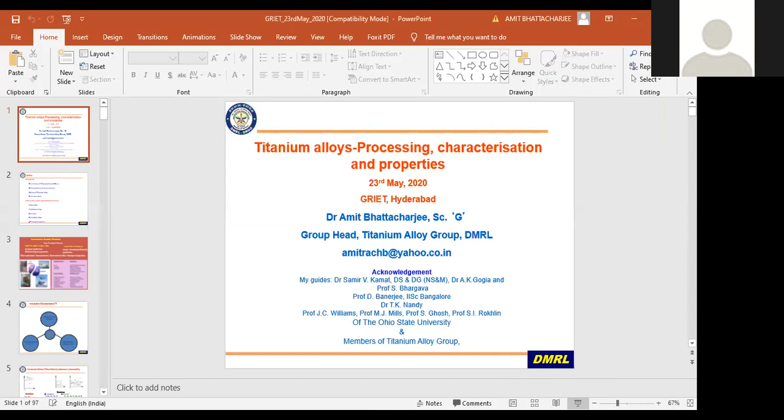Amit sir, good afternoon. Yeah, good afternoon. You are able to hear me, right? Yeah, it's crystal clear, sir. Okay, you can share the screen, sir. I'll just... Yes sir, it is visible. I can start, or should I? Yes, wait sir. Should I start? Let's start, sir.

Okay, good afternoon to you all. I am Amit Bhattacharjee, and thank you, Tanya, for the kind introduction.

I will talk about titanium alloys, its characterization and processing, as well as try to correlate the properties and the usages so that you can get a flavor of it. I will not go too much into metallurgy, although some amount of microstructures have to be shown because it correlates with the properties. So I will try to keep metallurgy to the bare minimum as possible.

Firstly, I need to acknowledge my guides, Dr. Samir Kamat, Dr. Gogia, and Professor Bhargava, who is no more, and Professor Banerjee, who introduced me to titanium alloys when I joined DMRL. Then Dr. Nandy, who was the earlier group head of titanium alloy group, and the professors at Ohio State University whom I worked with for the FAA-funded project - Professor Williams, Professor Mills, Professor Ghosh, Professor Rokhlin - and also the members of the titanium alloy group.

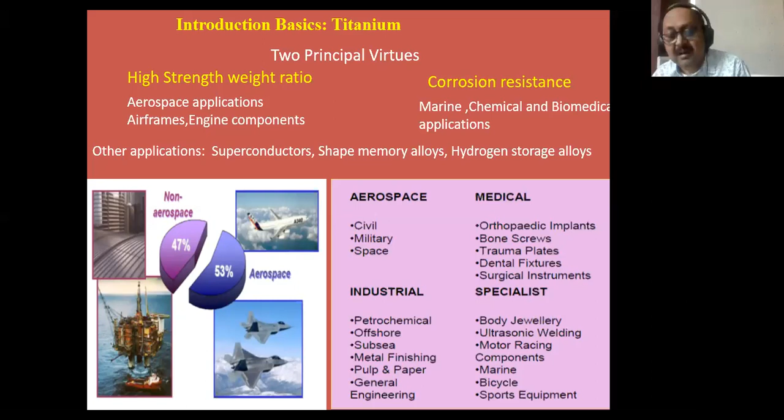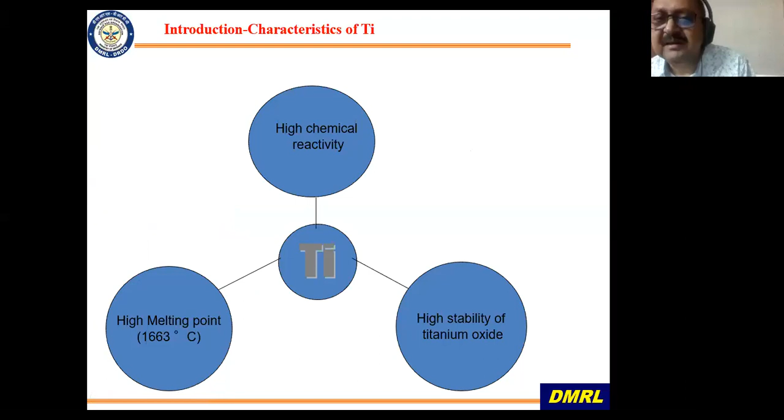Now coming to titanium, its melting point is around roughly 1663 degrees centigrade. Its problem is the oxide is very stable, and that is the reason it took many years to extract it for use as an engineering metal and alloy. It has also got high chemical reactivity, which is why it has to be melted in vacuum, and care has to be taken while processing it.

Now, as far as alloying elements are concerned, as you all know, titanium exists in two crystal structures: first is alpha, which is a hexagonal close-pack structure, and beta, which is a BCC structure. The alloys that stabilize either of these phases are known as either alpha stabilizers or beta stabilizers.

The elements in the beta isomorphous category are vanadium, molybdenum, niobium, tantalum, and tungsten. In the eutectoid category are iron, manganese, chromium, nickel, and also hydrogen, which is one of the gaseous elements that stabilizes the beta phase.

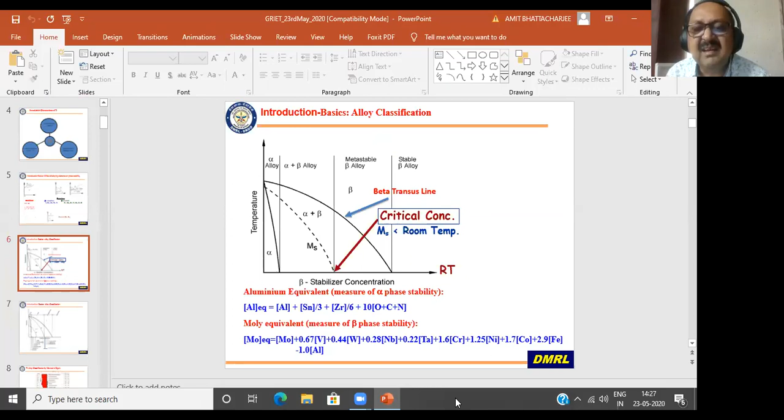In titanium also, yes. Please ask Ajay Kumar. You have a question? No sir, questions we will take in the end only after the presentation. No, we will not take questions now. Okay, fine.

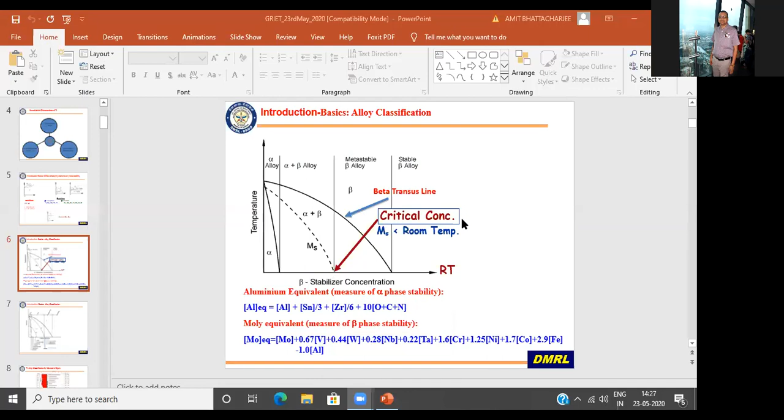So coming back to this, this line is known as the beta transus line, and it is very important for titanium alloys. In most of the alloys that you buy, you will see the beta transus temperature of that alloy, and above which the alloy exists in the beta phase, single phase beta region. So for each alloy, because the processing is done either above or below this, this transus line is very important. This is known as the alpha transus line, and below this the alloy composition will exist in single phase alpha region, and in between you have alpha plus beta.

Now this is where the conventional classification of the titanium alloys is shown on this diagram. On the extreme left hand side, where you have almost negligible beta stabilizer concentration, what you have is single phase alloys, known as alpha alloys. These are non-heat treatable. We'll look at each category in detail, but here I'm just giving you the classification.

Then you come into the region of alpha plus beta alloys, where the beta stabilizer concentration is slightly higher, so you have both alpha and beta phases existing. Beyond that you have the category of beta alloys, and the first region is where the beta stabilizer concentration is comparatively less, known as the metastable beta alloys, and at higher alloy concentrations, it is known as stable beta alloys.

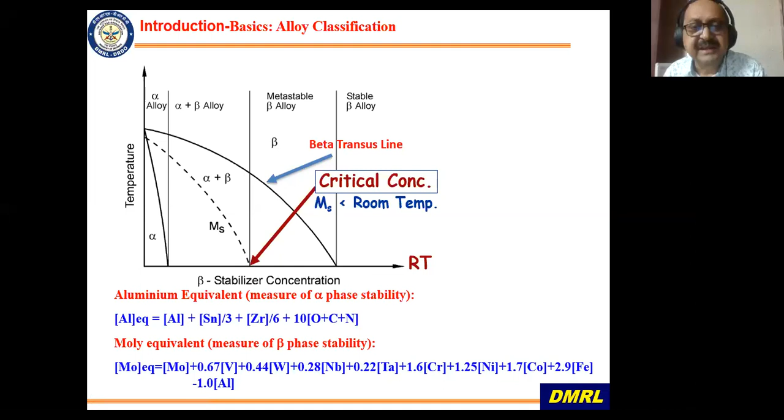Here again, examples of certain alloys are given. From here in the alpha alloy category, you can see Ti-5Al-2.5Sn. You only have alpha stabilizers, and then commercial purity titanium also comes into this. As you all know, commercial pure titanium has got quite a good strength level, and it can compete with many of the aluminum alloys, which is why it's also an important category. Then you come into the alpha plus beta alloys, where one of the important alloys is Ti-6Al-4V, and 50% of the world titanium production is of this alloy.

And then there are other alloys which are for high temperature application, which also belong to the category of near alpha titanium alloys.

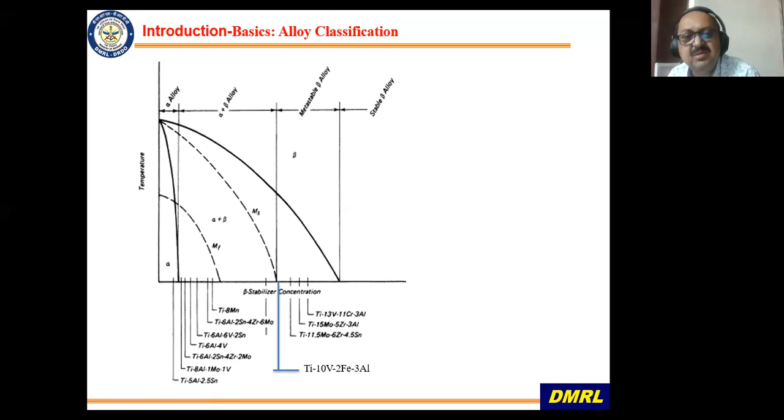And then when you cross the martensitic start line, you go into the beta alloys. The first one widely used is titanium 10 vanadium 2 iron 3 aluminum. It is one of the metastable alloys that Boeing uses for landing gears and other applications, very widely used. There are other beta alloys, and we'll talk about one or two later on. This is again just to give you an overview of classification.

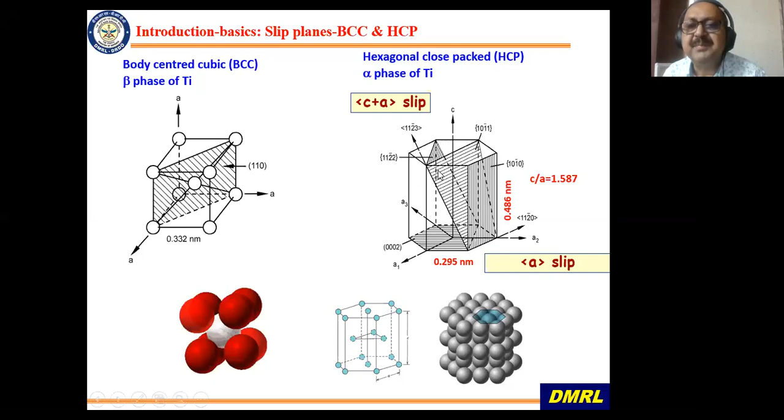Now I will try to explain the Burgers orientation relationship. If you have looked at the microstructure of titanium alloys, mostly you must have seen Ti6Al4V beta transformed structure. You see a very geometric pattern, and that is because of this Burgers orientation relationship.

Most of the transformations in conventional titanium alloys is beta to alpha or alpha to beta. Now, the close packed plane of this maps onto this plane, and one of the close packed directions matches perfectly with this, and the others are slightly off.

So when you heat, let's say, Ti6Al4V to the beta region, it goes into this phase, and then when it transforms to alpha, each of these planes has 2 close packed directions, and you have 6 such planes. So you get 12 variants of the alpha phase, and that is why you see a very geometric pattern in the microstructure, a resultant of this Burgers orientation relationship.

The close packed direction of the HCP matches with the close packed direction of the BCC, but only in one direction is it a perfect match. In the rest of the directions, it is slightly off, and that is how it is in titanium alloys.

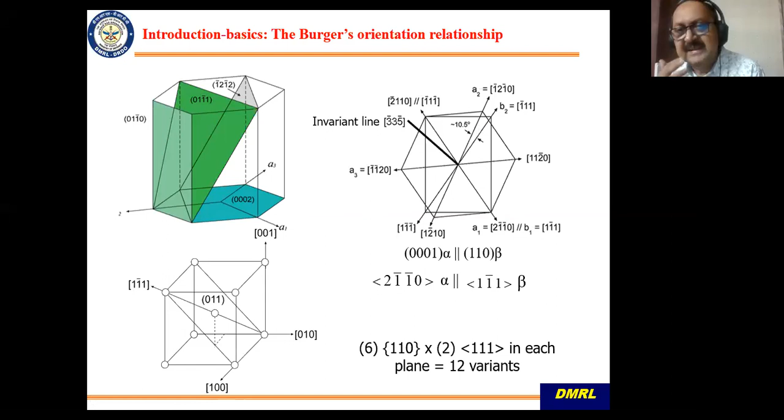Now, I will briefly talk about some of the heat treatments you hear about, so that you are aware and not perplexed when I mention them. First is homogenization. After melting, the first thing done is that the ingot is heated up high into the beta regime, because there are a lot of segregations and things like that.

If you anneal or homogenize at high enough temperature, chances are that you will reduce the segregation. Homogenization is normally done high up in the beta region, roughly around 1100 to 1200 degrees centigrade for all the ingots. Then we come to solution treatments.

There are several solution treatments. Two of them commonly used are, one is beta solution treatment. In beta solution treatment, you take the alloy to this beta regime just slightly above. You do not want to take it too high, because the BCC structure is a very open structure and diffusivities are very high.

There can be very large grain growth if you take it too high a temperature or keep it for a longer time, so you have to be careful and do a shorter time. The beta solution treatment is done just above the beta transus, maybe maximum 50 to 100 degrees centigrade above the beta transus of the alloy.

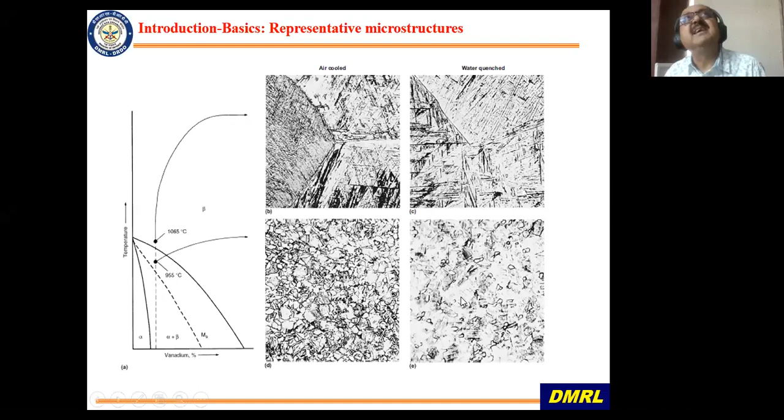As far as alpha plus beta alloys are concerned, if you heat treat an alpha plus beta alloy like Ti6Al4V into the beta phase, and then you have cooled it, either air cooled or water quenched.

If you water quench, you will get martensite. I will show you the martensite, but here it has been air cooled, and you can see different colonies of alpha. This is called alpha colony. That is where the titanium alloy starts becoming complex. You see, you have one grain which is a prior beta grain, but you have in them several colonies, and you can see the geometric pattern that I was talking about when discussing the Burgers orientation relationship.

So these itself can have different orientations, so they can work as subgrains. That is where the properties etc. start getting affected.

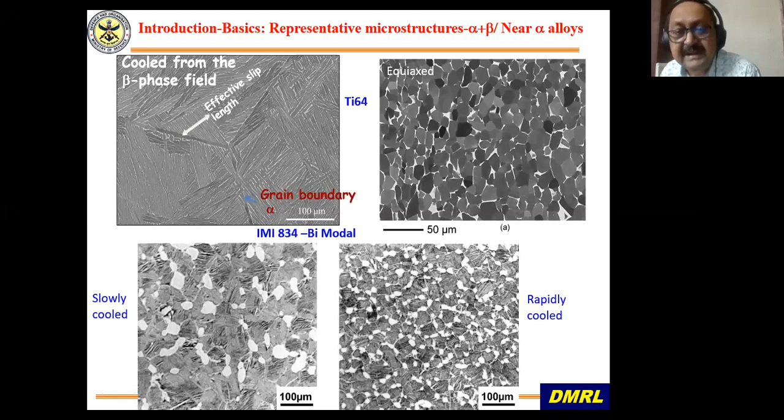Now this fine alpha is precipitated in a different region. Once you have aged this alloy, then only this fine alpha precipitates and gives it high strength. So all these beta alloys have got much higher strength as compared to Ti6Al4V and such.

But in these alloys, after you have alpha plus beta deformed, you solution treat in the alpha plus beta regime, and then you have to age it to get this. If you deform, solution treat, and cool Ti6, you will get this precipitation of the alpha. But in this one, not. So that is the difference between beta alloys and the alpha plus beta alloy.

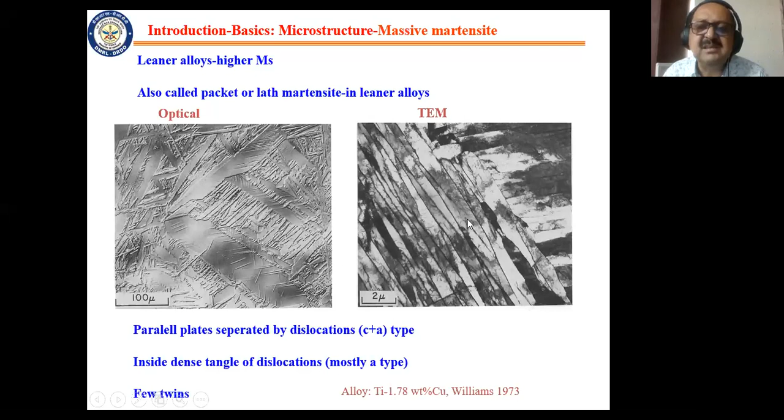Again, in the TEM picture, this has got very little twinning in it, and a lot of dislocation structure which you can see inside. Then in alloys which are much richer, same type of alloy but now with the copper percentage increased to 12%, you see the structure of the martensite is slightly different. It is again very fine lath, but now you can see a lot of twins inside if you do TEM. So this is called acicular martensite, and it occurs in much richer alloys where the MS temperature is comparatively lower as compared to the other example I showed you.

But remember, in titanium, martensite does not strengthen as much as in steel, because it does not trap interstitial elements and doesn't cause that much distortion. But it certainly refines the microstructure and causes a slight increase in strength, but not as much as in steels.

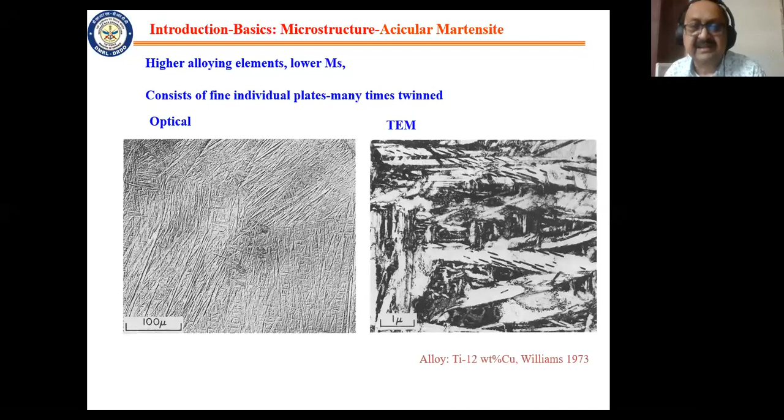Now again, another example is 10-3, which is a beta alloy. If you beta solution treat it and then start deforming it, that is, even do a tensile stress testing - if you remember, 10-3 I had shown on the verge of stability and metastability, so it is on the boundary line of crossing over from martensitic to non-martensitic. So it is on the borderline, and it retains the beta phase when you quench from above the beta transus temperature. But when you start deforming it, that is, you push the material or give it a slight amount of energy, it starts transforming to martensite.

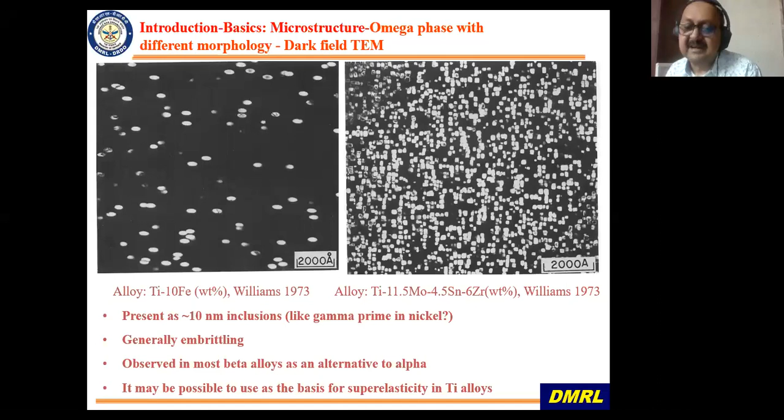Similarly, different other morphologies of omega phase can occur, in cuboidal shape or ellipsoidal shape. Again, it depends on the misfit which is there due to the alloying element. But these phases you will not be able to see even under SEM, although they will affect your mechanical properties. So in case of beta alloys, you need to be careful.

That is why while processing beta alloys, you have to be careful. There are strategies for processing all titanium alloys as well as beta alloys, so that you don't get much precipitation of alpha around the grain boundaries. But that is a common thing in beta alloys, and you need to be careful.

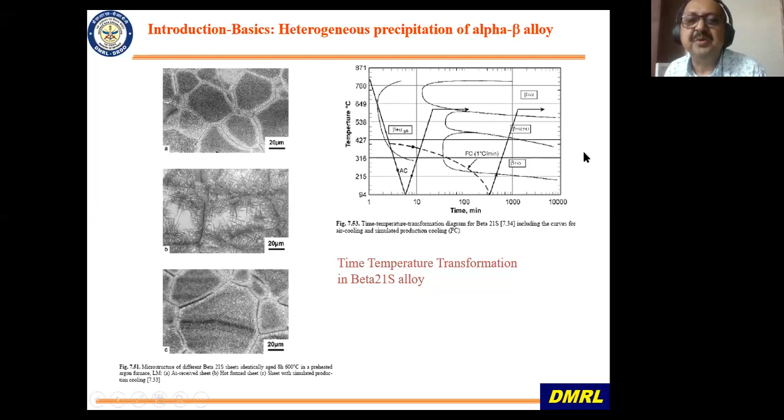The other very important aspect where titanium alloy differs from steel is, if you want to globularize, most of the time you will see that alpha and beta precipitate as lamellar structures. If you want to make it globular, it is not possible just by heat treatment as in steel. What you have to do is deform it.

That is why many titanium alloys are given a lot of deformation in the alpha plus beta regime. Otherwise, you will not be able to refine the grain sizes and globularize them. Once you take it to beta, all this effect is lost. So again, in titanium alloys, you have to be very careful and monitor your temperature very well.

Now I talk about melting, although I'll not discuss it in detail. This is one of the titanium sponges, the first sponge cake made in DMRL. As you know, it is produced by Kroll's process, where titanium oxide is converted to TiCl4, and that is reduced by magnesium, which is driven out. Then you get a cake like this, known as titanium sponge, which is then crushed. That is the starting raw material.

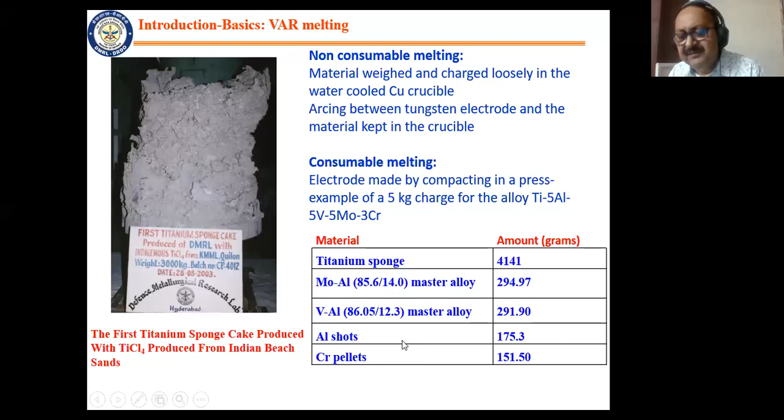So what you do is add them as master alloys. Here we have used moly-aluminum master alloy, and also vanadium-aluminum master alloy. Then you can add extra aluminum, or any other element that is needed, mix it thoroughly physically, and then press it into an electrode to make an electrode.

This is just a schematic of a VAR melting process. Here I'm showing a consumable melting. This is called a stringer rod, and this whole thing is enclosed in vacuum. Here you have the vacuum pump. Here you have the electrode.

The same thing is shown here also, and this is a copper crucible which is water cooled from outside. Here the water comes in and goes out, and by arcing you are melting, and then it is depositing in the crucible. Slowly this is lowered, and the electrode gets consumed and solidified in the copper crucible. Here I am just showing one industrial furnace which is underground, so you can see the top part of it.

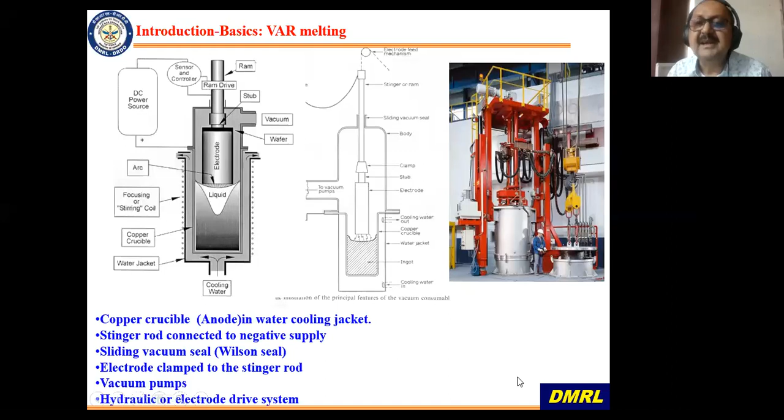It can be above ground also, so both are possible. Industry furnace capacities are roughly from 250 kg to 10 tons, so these are huge furnaces.

Now let's talk a bit about the corrosion resistance of titanium. Titanium has got very good corrosion resistance. Here the galvanic series in flowing seawater is shown, and you can see titanium is towards the top end, so it has very good corrosion resistance against seawater and many other chemicals. That is seen in this galvanic series in seawater.

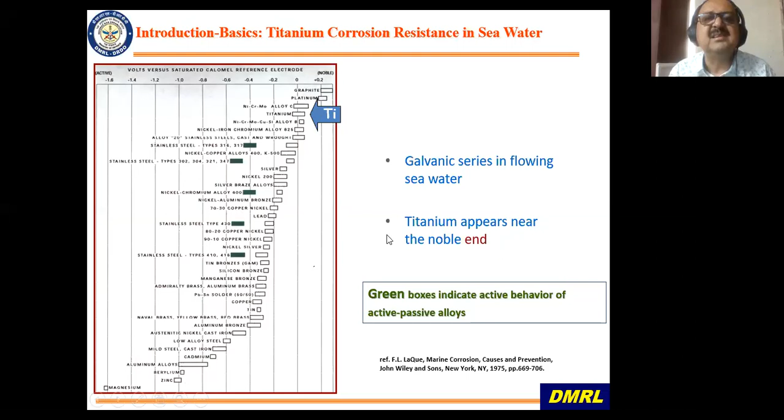Now, the reason titanium has very good corrosion resistance is because it has a very thin protective layer of TiO2 on the surface. It forms, but mind you, this is not as impervious as in aluminium. So it does oxidize, but still it serves a lot of purposes and protects titanium.

This oxide layer performs very well in oxidizing atmospheres or solutions which have chlorides, sulfates, etc. But it does not perform very well in reducing atmospheres like sulfuric acid, and also HF. That is why HF plus HNO3, known as Kroll's reagent, is used as a common etchant for titanium alloy.

The corrosion resistance of titanium can also be enhanced by adding certain elements like palladium. So in electrode materials, palladium and such elements are added so corrosion resistance increases. Another point about titanium alloys is there are no inclusions because they are melted in vacuum, very pure materials, unlike steel. So they are absolutely clean, and there is no pitting corrosion taking place.

But titanium alloys do undergo crevice corrosion because of the nature of this oxide. And hydrogen also can cause problems because hydrogen is very much soluble in most titanium alloys, and it can cause embrittlement problems, so you have to be careful.

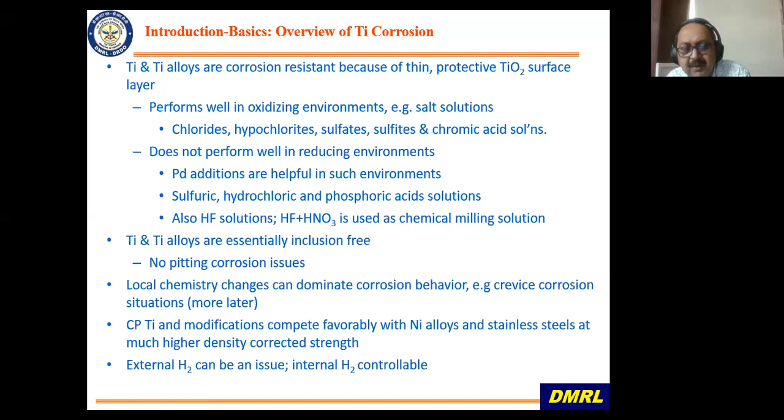So I will now talk about different alloy systems and then finish off. I will go on first to alpha alloys.

Here are the commercial alpha alloys. Several alpha alloys are shown here, starting with several grades of commercial purity. CP stands for commercial purity titanium, and you can see the only alloying element is oxygen, with some amount of iron put in to control the grain size. Otherwise these are single phase materials, difficult to control the grain size.

Here I am showing you the yield strength. Oxygen dissolves very well in titanium, a large amount of it does dissolve, and it is one of the main strengtheners. Although it also embrittles, it is used as a strengthening agent, and you can see here that as you increase the oxygen, yield strength levels go up. So there are several grades of CP titanium depending on what oxygen levels you want, and as I told you, palladium addition also improves corrosion.

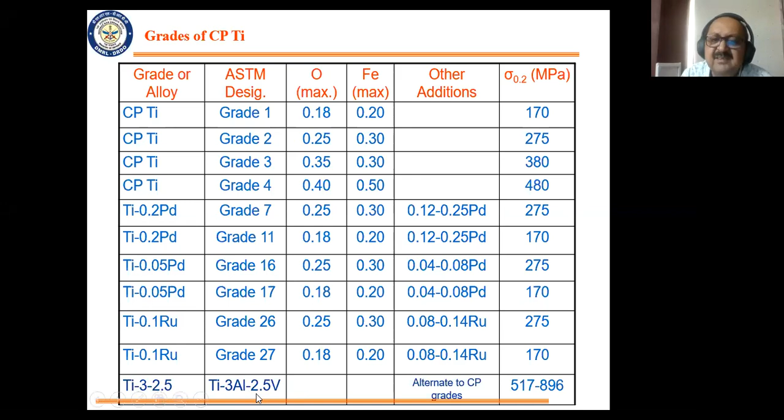So these are known as non-heat treatable alloys. Another alloy classified in alpha as well as alpha plus beta is known as half alloy. I did talk about half alloy earlier. It has got a composition which is half that of Ti6-4, and it is used for making aircraft tubes and all, I will show you that. And the strength level is in this regime.

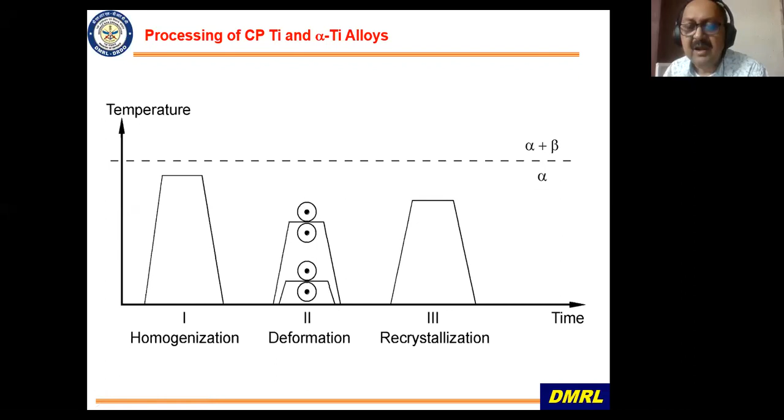Now, how are these alpha alloys processed? First, it is homogenized in the alpha regime itself, that is heated, and then deformation, that is forging, rolling, everything is done in alpha phase field only, and then recrystallization heat treatment also in the alpha phase field. Temperature you can choose depending on the grain size that you want, so recrystallization temperature also is in the alpha phase field, and this is how commercial purity titanium and alpha alloys are processed. Very simple processing, not much.

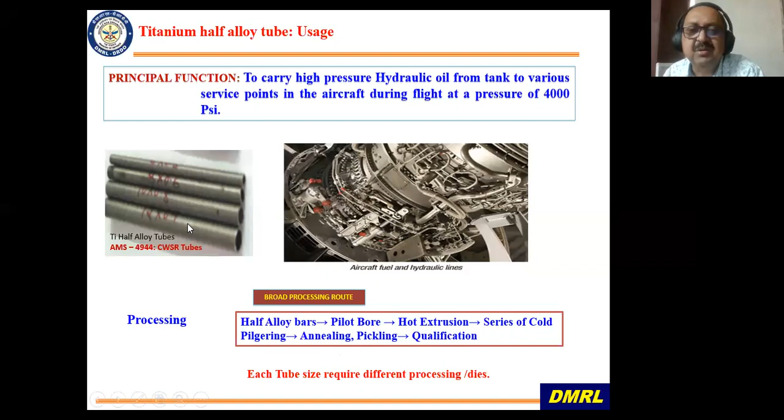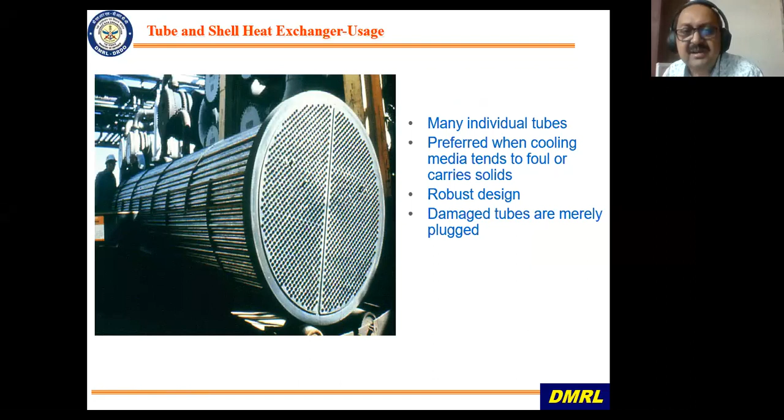Then another application is heat exchanger. All these tubes are of commercial purity titanium, or you can use other alloys depending on the strength, etc. that you want. But titanium alloy is certainly one of the major applications, also the heat exchanger applications.

Temperature wise, strength wise, it is in the middle category, and there are two types of Ti6-4. One is normal Ti6Al4V, which has got higher amount of oxygen, strengths are higher, and another which is used for formability applications is known as ELI grade, which stands for extra low interstitials, where the oxygen and other interstitials are limited to 0.13 or 1300 ppm. And then we also have near alpha alloys which are used for high temperature applications.

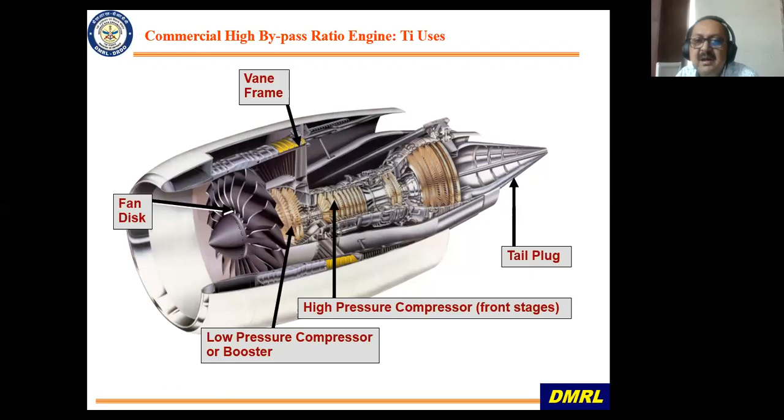In alpha plus beta alloys, but not in beta alloys, I will show what forms in beta. And then you have the precipitation of intragranular alpha, that is the other alpha that precipitates. It can strengthen, it can do other things.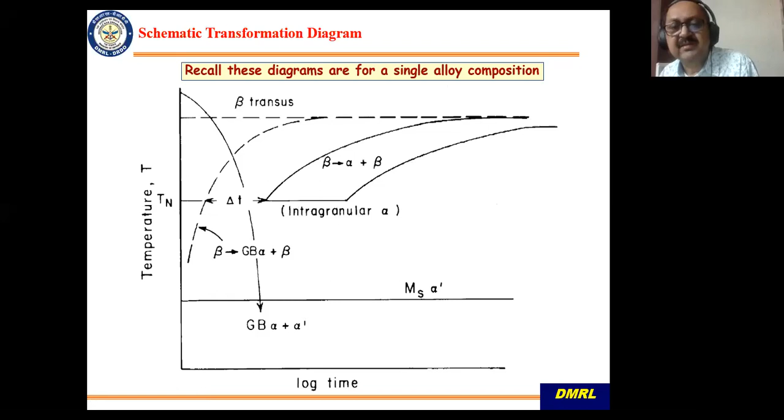Here I am trying to show you the general property trends of different microstructures. On the y-axis you have tensile ductility, and on the x-axis, the yield strength. An equiaxed structure always has higher yield strength at similar ductility levels. So a lamellar structure has got comparatively lower tensile ductility as compared to equiaxed structure. So if you are looking for formability applications, you should use this kind of structure, not a lamellar beta treated structure. You will not be able to form it very well.

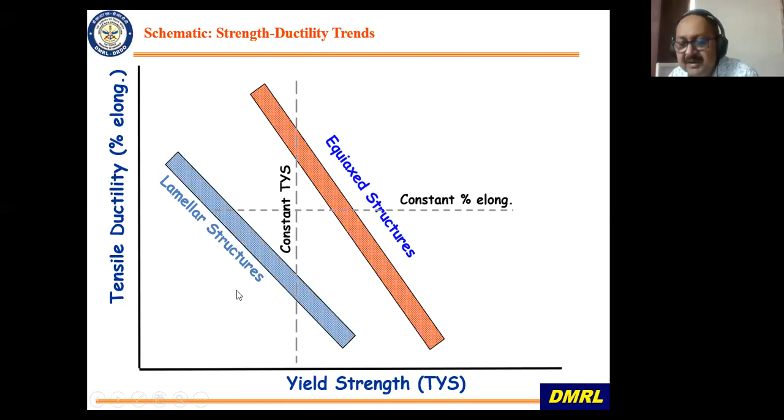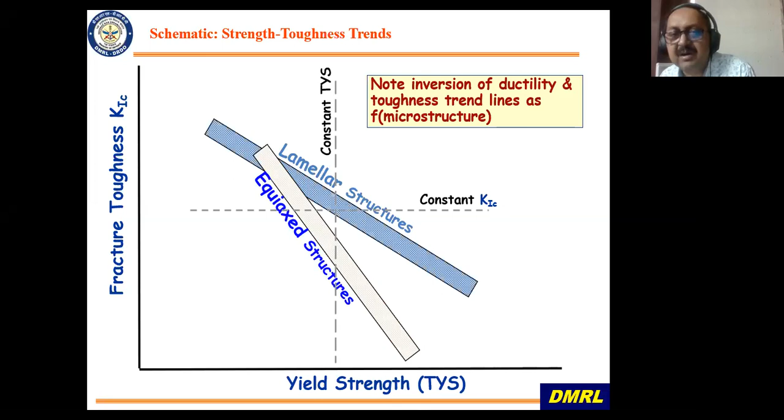Then here I am showing you the fracture toughness versus yield strength. A lamellar structure, that is a beta treated structure, has got a higher fracture toughness at similar strength level. An equiaxed microstructure or a bimodal microstructure has much lower fracture toughness as compared to lamellar structure, which has got a higher fracture toughness always. So if you want good fracture toughness, you should go for a beta treatment to get a lamellar structure.

Now, if you want to do a fully equiaxed or a bimodal processing of alpha plus beta alloys, what you have to do after homogenization is deform, giving a lot of deformation in the alpha plus beta regime. Remember, this is to break up the alpha laths so that you can globularize it, and then recrystallize slightly higher than the deformation region, and then again finally aging, a similar aging. So depending on the cooling rate during the heat treatment after recrystallization, you can get either an equiaxed microstructure or a bimodal microstructure.

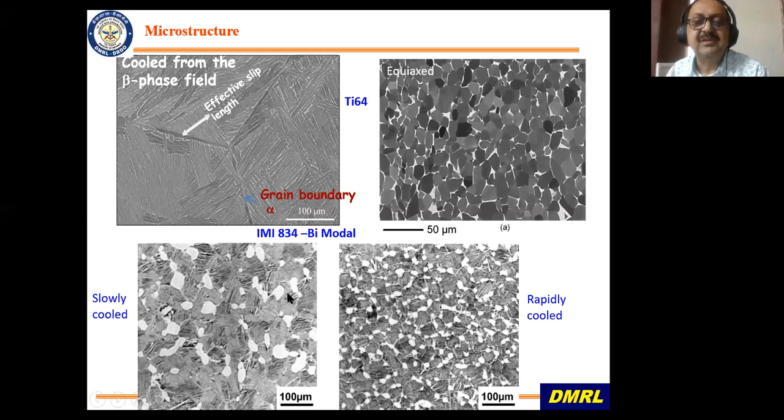Now, many times you would like to have a combination of good fatigue and good creep. So that is where this thing comes in - it gives a good combination of fatigue and creep properties. Fatigue because it restricts the grain size to a finer grain size, and the lamellar structure gives you good creep. So these kinds of processing are done for compressor blades, turbines, and all these kinds of things.

Now I will go on to near alpha titanium alloys, which are a subcategory of alpha plus beta alloys.

Near alpha alloys occur towards the left-hand side of the pseudo-binary phase diagram, towards the alpha phase. What you try to do is reduce the beta phase, because beta phase has got higher diffusivity, so it is not good for creep applications. So you decrease the amount of beta stabilizers, add neutral stabilizers like tin and zirconium. Tin also combines with aluminium to precipitate alpha 2, which strengthens, and that is what is used in high temperature titanium alloys. You replace the higher diffusivity beta stabilizer like vanadium with lesser diffusivity beta stabilizing elements like moly, niobium, etc., so that diffusivity is lesser and you can get good high temperature properties.

The other problem with near alpha titanium alloys is you have to restrict iron and nickel like anything. You have to be at ppm level. I'll show you the effect, but it really spoils the creep properties, and that is why titanium sponge with very low iron and nickel is very rare in the international market. These are very low levels. Let me show you how much.

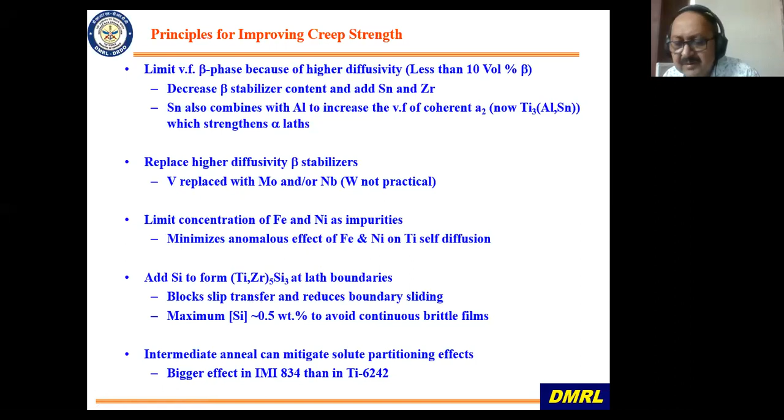Silicon is used in most high temperature titanium alloys because it basically improves the creep properties by blocking the slip transfer, restricting deformation between the laths. I will show you the microstructure of this. There is also an intermediate anneal which can improve the creep, but I am not talking about that in detail now. When we talk more about titanium, we'll cover that. Now, this is how the near alpha titanium alloys are processed.

Now here I am showing you the comparison of two types of structure and creep. This is a bimodal structure, this is a lamellar structure. As I told you, this is strain and this is time, at 600 degrees centigrade and 300 MPa of load. The bimodal structure has higher creep deformation, whereas a lamellar structure, that is a beta treated structure, always has a good creep property. This is a lamellar structure of the IMI 834 high temperature titanium alloy, and this is a bimodal structure. These are optical microstructures.

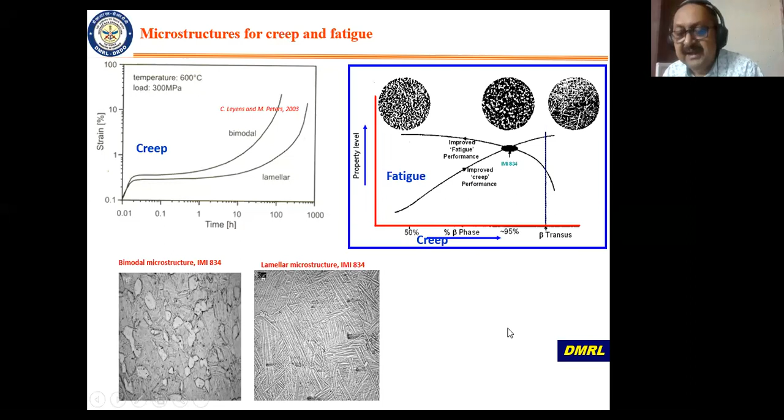Now here is the crossroad. On the y-axis we have fatigue, and on the x-axis you have creep. So both are at crossroads. That is why, wherever you want both of them, you have to have an optimum structure, and that is where the bimodal structure comes in, which is a creep-fatigue optimized microstructure, used for blades, discs, etc. in the rotating parts of an aero engine.

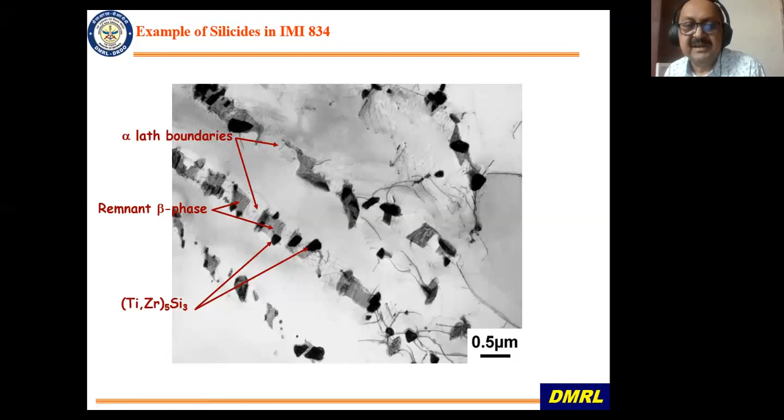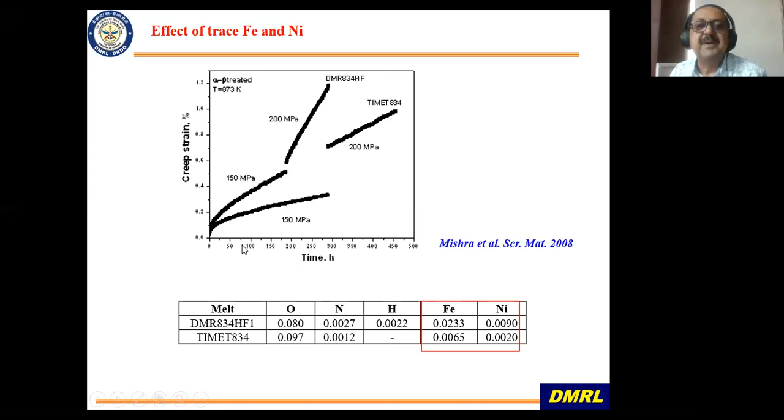Here you can see two alloys: TIMET834, which has got much lower iron and nickel, compared to DMRL 834, which has a much higher iron and nickel content. Mostly iron and nickel come from the titanium sponge and also the master alloys that you use, so you have to be careful with them. You can see the jump in creep properties only because of this.

Then I come to another important property, known as dwell fatigue. Many aero engines experience this. As compared to a sawtooth kind of loading, in dwell fatigue you hold the load at the highest point for some amount of time, and that causes a decrease in fatigue life more than sawtooth loading. This is known as cold dwell fatigue because it happens at lower temperature, and it is very pronounced in near alpha alloys and alpha plus beta alloys.

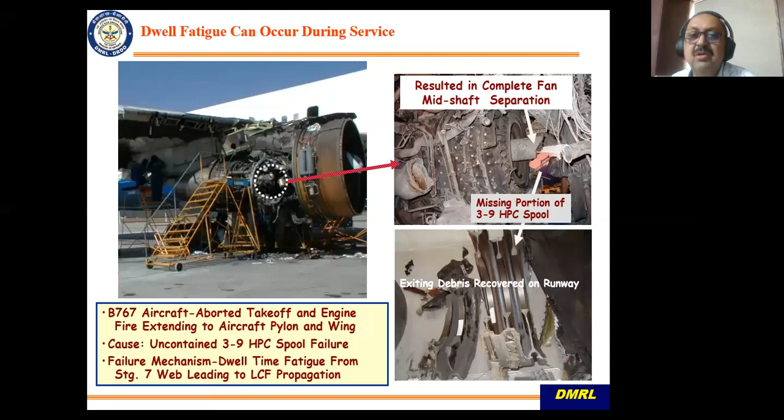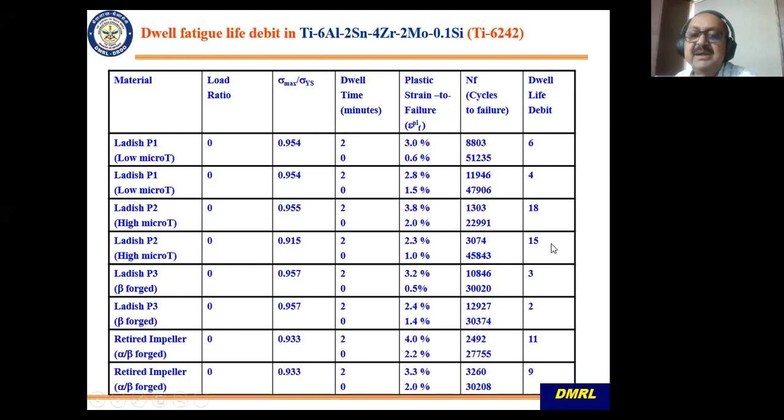Maximum stress was 95% of the yield stress. You can see in the low microtexture material, the dwell fatigue debit is much lower as compared to the higher microtextured material. And for beta-forged material, it is lower for various other reasons. I'll just show you the reason.

Now, why dwell fatigue cracking happens is explained by Bache, although this explanation is by no means complete, but it's still used because there's a lack of clearer explanations available.

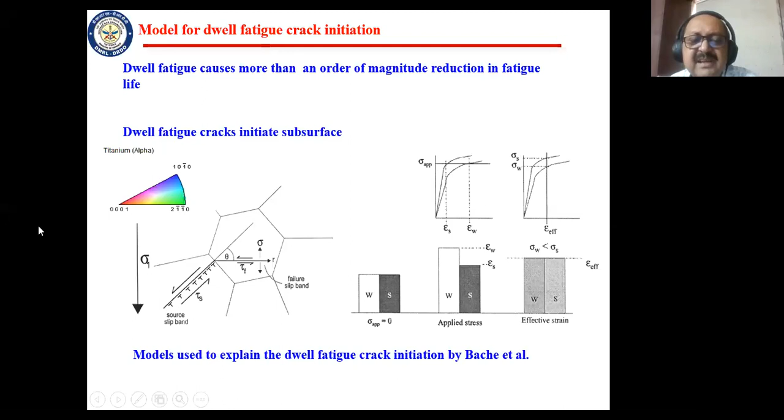If you have a textured material, with an orientation where you have easy deformation and easy slip, alongside an orientation which is difficult to deform—that is, where you have to deform in the c+a region—then what happens is it deforms in the soft region and unloads onto the hard region, that is, deformation-wise hard. It adds onto the applied stress, and it reaches the fracture strength before it reaches the deformation stress, and so it starts cracking. I will not go into too much of these physical details—if somebody wants, I will explain later, because I want to finish within 5 minutes.

And mind you, dwell fatigue cracks happen inside. We have been taught that fatigue cracks appear on the surface, but dwell fatigue cracks initiate on the inside.

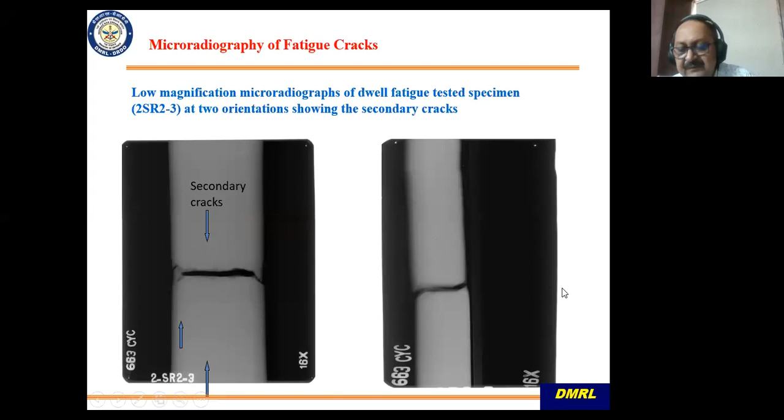Micro radiography was done, and along with this main crack, you can also see very fine secondary cracks which are embedded. We wanted to know what the orientation is around these cracks. As I told you, you can see this. These are dwell fatigue initiation regions.

Somebody again has raised hand, but I will attend after I finish my lecture.

Now there are a lot of techniques where you can find out the orientation of this plane with respect to the loading axis. You can also know the orientation and all. There are methods which are there. I'll not go into those details, but certainly if somebody is interested, I can explain.

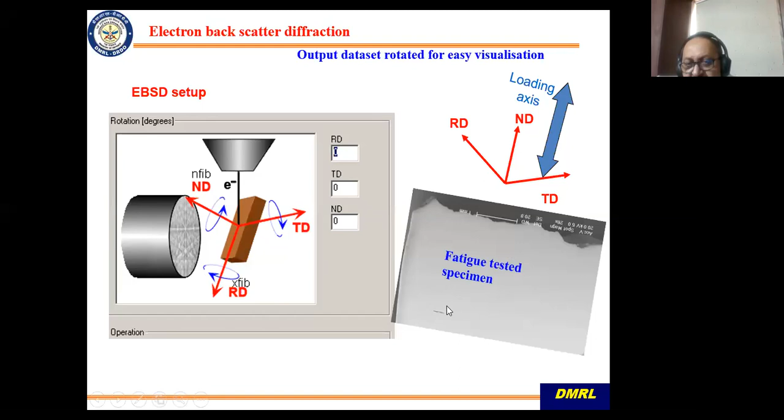Now, this is the broken flat sample that I had shown the micro radiograph of earlier, and this was oriented properly. In texture work, you have to track the orientation of the sample, and this is the camera, and this is the electron gun, and it was oriented properly. That is, the loading axis is in this ND direction, and then the scans were taken after polishing inside where the crack is exposed, and I will show you the microtexture.

So what has been told is correct, that the deformation happens in this soft region and it unloads onto the hard region, and the cracking initiates in the hard-to-deform region. Microtexture plays a huge role in this dwell fatigue failure.

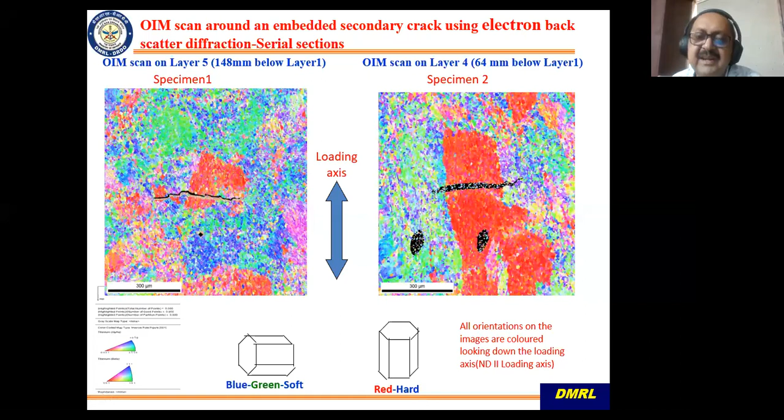So this is again the same microstructure of which I had shown you the microtexture earlier. You cannot make too much difference in microstructure, but I will now show you again a microtexture. You can see the hugely different microtextures.

This colored region is the microtexture region. Some have very fine microstructure. This is called a random microstructure, that is in specimen 3. These are stringers which are there.

Again, you can see stringer-like oriented regions, and these are larger microstructure and microtexture regions, and this causes lower fatigue life, lower dwell fatigue life, and all that. Okay, so that is where I will end.

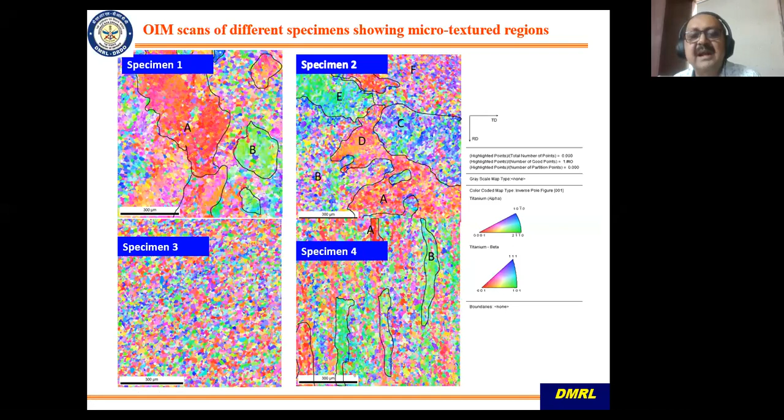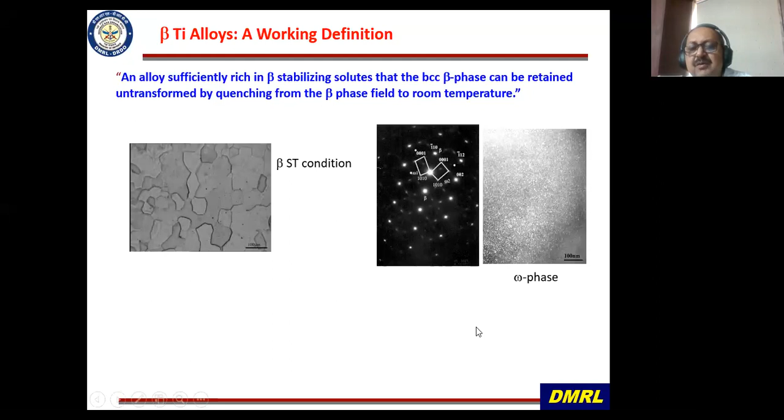Near alpha titanium alloys, moving on to beta alloys. Now beta alloys, as I told you, have got much higher amounts of beta stabilizers, and you can retain the single phase beta by quenching or faster cooling, and you also get very fine precipitation of omega phases. Most of the beta alloys, that is what you have to be careful with.

So first you have the metastable beta alloys and then the beta alloys. Again, you have a TTT diagram. In this case also, you have firstly grain boundary alpha forming, and instead of martensite formation, what you have in beta alloys is the omega solvus.

So whether you are quenching it or isothermally aging at low temperatures, lower than let's say 450, 400 degrees centigrade, you are bound to get omega phase, which is embrittling. So you have to be careful in beta alloys, and that is where the problem lies in beta alloys in case of welding and all.

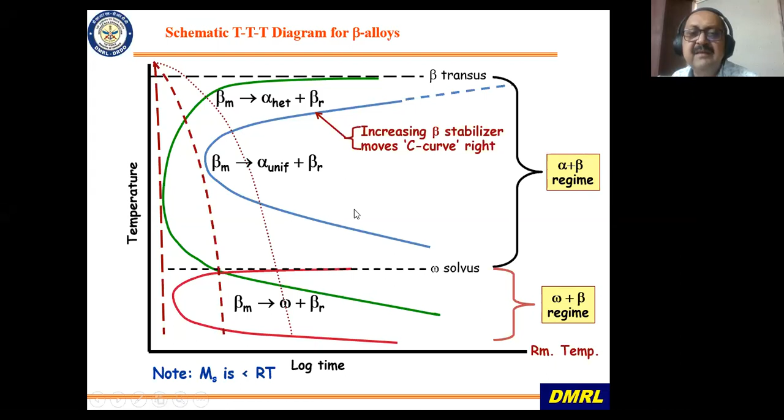So then as you cool more or for longer time, you get alpha precipitation, which is uniformly inside the grain.

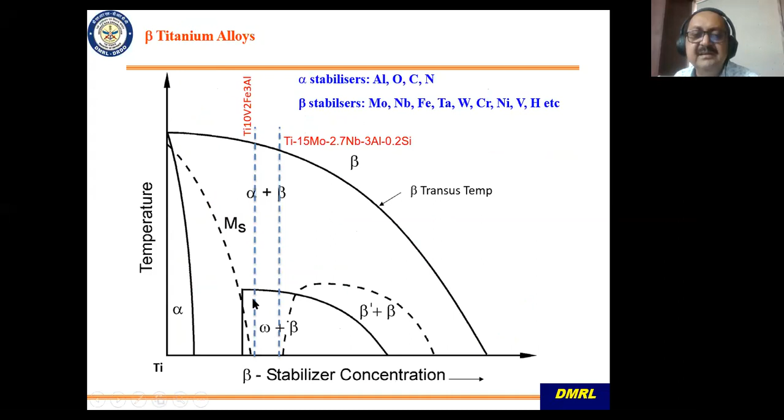So I will talk about just two alloys, 1023 and 21S. One is at the verge of stability and metastability, and the other is much more stabilized beta alloy. You can see this is the omega plus beta region. So in beta alloys, you start getting another phase, which is the omega phase.

What are they used for? They are used for high strength, not damage tolerant critical fasteners, HCF limited helicopter rotors, aircraft landing gears. They are also used as springs—most titanium springs are beta alloys. There are other reasonable damage tolerance structures, and they're used in oil field applications. Most biomedical applications use beta alloys, since titanium alloys are biocompatible and beta alloys have lower modulus. That is why many newer orthopedic implants are the new beta alloys.

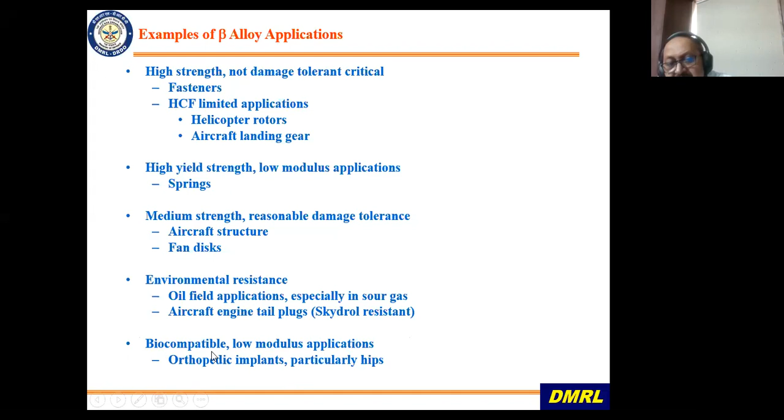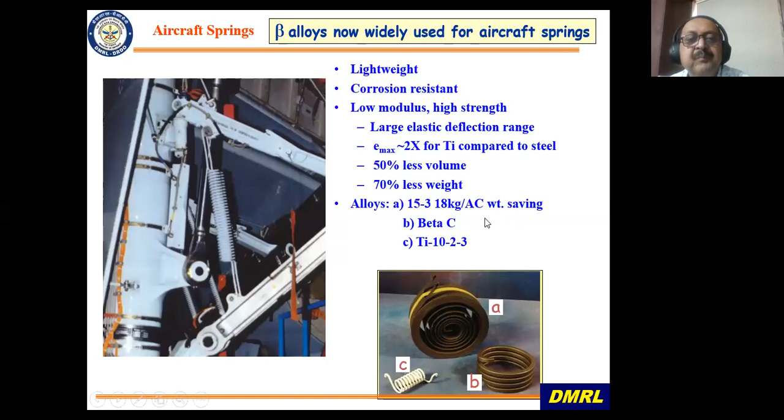Here I'm just showing springs in aircraft, beta C and 1023. These are used as springs because the elastic modulus of beta is much lower than the alpha phase, so beta alloys have got lower modulus.

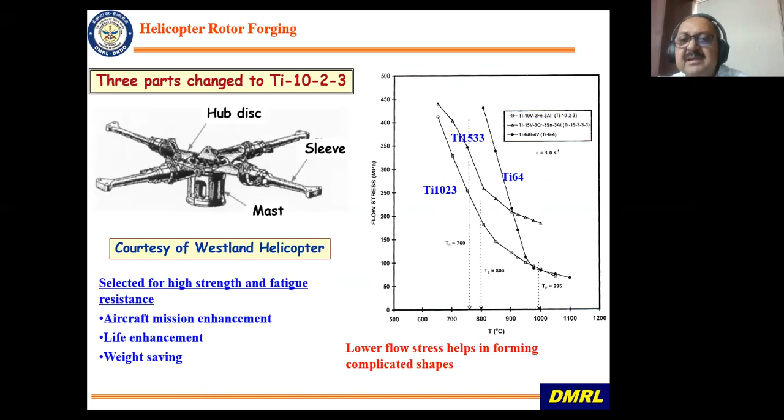Why 1023 is very attractive is because it has got one of the lowest flow stresses. Here I'm plotting flow stress versus temperature, and it has one of the lowest flow stresses, so it can reproduce the die cavity very well. That is why 1023 is very widely used for closed die forging applications, even much better than Ti64 and other alloys which have very high flow stresses.

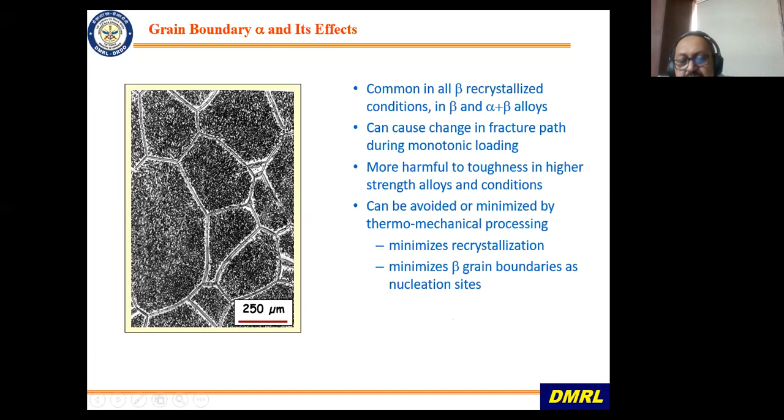As I told you, in case of beta alloys, you have to be more careful about grain boundary alpha, because there is too much strength difference. Inside the grain, the strength is high, and around the grain boundary, it is less. So you cannot allow grain boundary alpha precipitation.

But this is a point of concern, and there are processing routes to minimize grain boundary alpha precipitation. Beta alloys are slightly difficult and challenging to process because the processing window is very narrow, since the beta transus temperature is lower due to added stabilizers. So the processing window gets narrower, and you have to hit the right window of deformation as well as temperature to get a uniform structure. If you are either lower or higher, you will get a non-uniform microstructure. So that is where you have to be very careful.

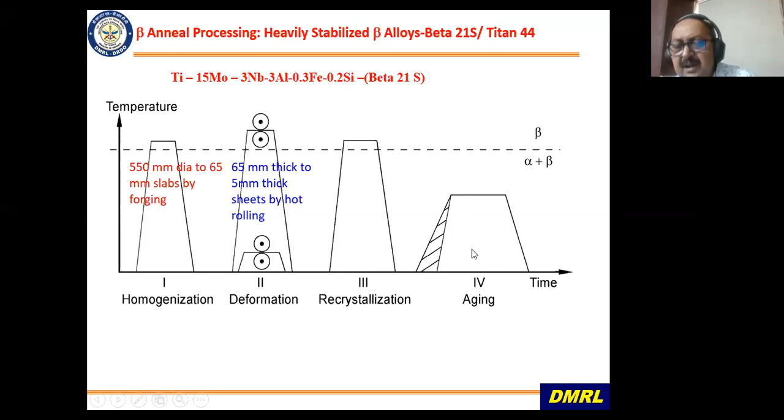The beta alloys are also similarly processed. Some are beta processed, like 21S. So you have homogenization and then deformation in the beta phase field. You can also do a slight amount of alpha plus beta deformation, recrystallization in beta, and then aging in alpha plus beta to get the fine secondary alpha precipitation.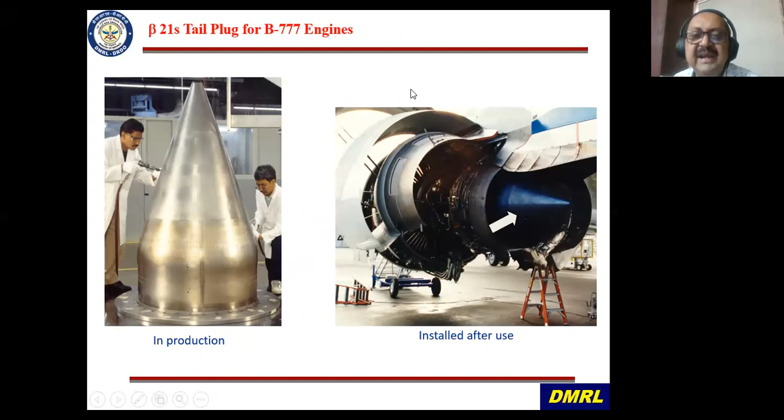These are some applications of 21S—in the nozzle behind the engine, and also on the aircraft structure as sheet applications and so on.

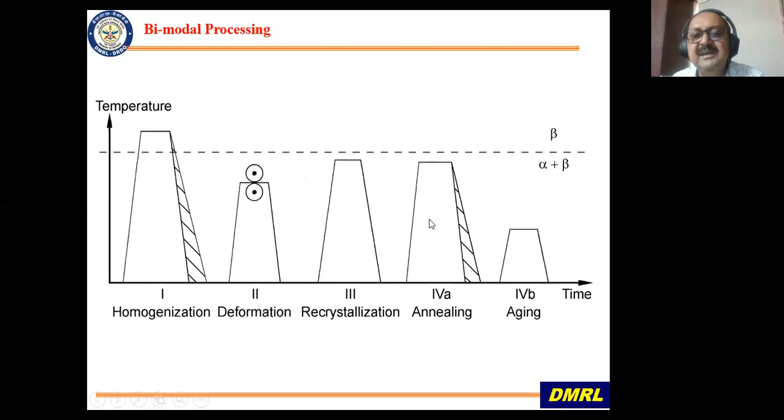You can also do bimodal processing, as in the case of Ti-10V-2Fe-3Al. Wherever you have fatigue kind of application, a finer structure is much better, and that is done for metastable beta alloys. Similarly, just like alpha plus beta alloys, they are alpha plus beta deformed, and then most of the time these two treatments are combined together: recrystallization or solution treatment, and then finally aging.

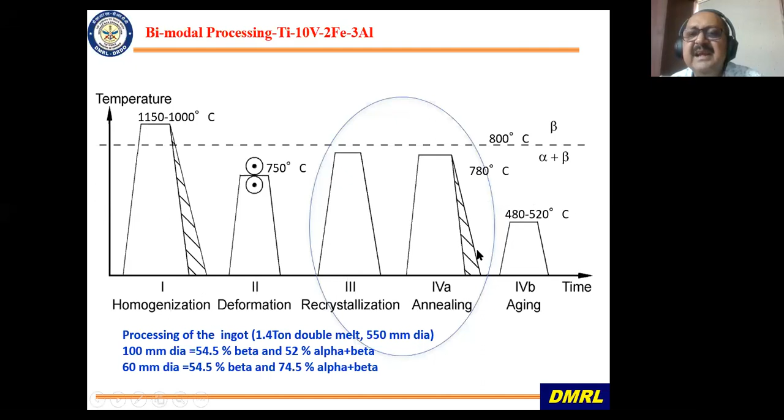These are the effects of each treatment. I will not go into this much detail, but if you want to discuss, we can do that later. This is how Ti-1023 was processed: it was homogenized in this temperature range, then alpha plus beta deformed, then annealed at 780, and then aged around 480 to 520 degrees centigrade.

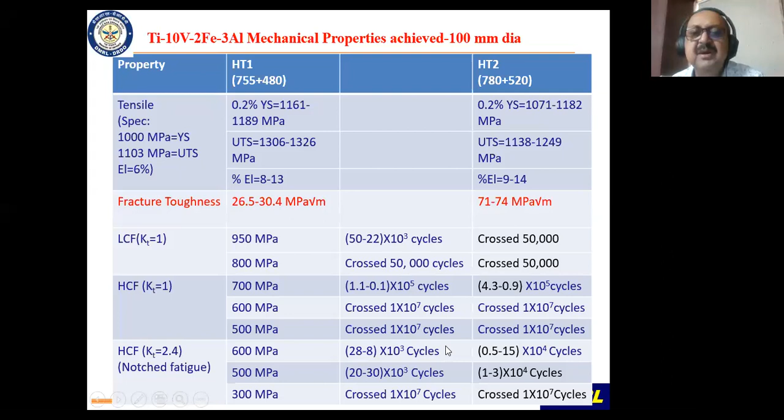These are some of the properties. You can see very high strength levels are easily achievable, but you can also get lower fracture toughness unless you do good microstructure control or heat treatment. But you can also pump up the fracture toughness, and these alloys have very good fatigue life, both LCF and HCF, and also notch fatigue life. I'm not going into detail, just giving you a flavor.

Different microstructures can give you different fracture toughnesses. Here the solution treatment was done lower, both solution treatment and aging, and the alpha precipitation was very fine, so it resulted in lower fracture toughness. But we changed the heat treatment, and when we get coarser alpha, we get better fracture toughness too. So the same material can behave entirely differently. You need to choose the heat treatment and microstructure properly to get proper properties.

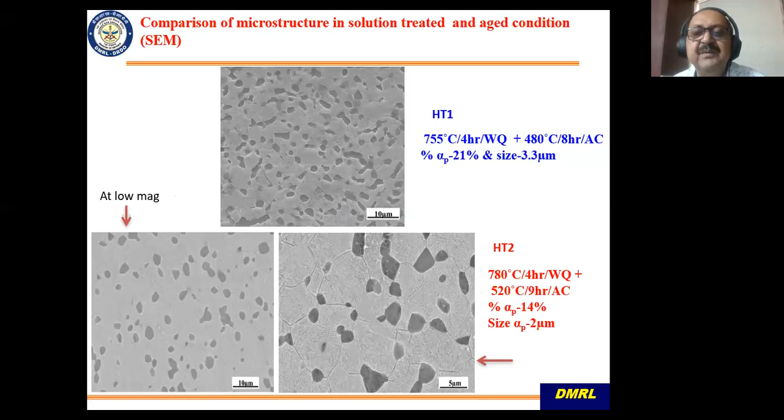This is the microstructure: you have a beta grain here, pinned by primary alpha, and inside these grains you have very fine precipitation of secondary alpha, which gives strength. This is the effect of grain size. Beta treated grain size plays a very big role in elongation, so reduction of grain size does play a major role in increasing the ductility of titanium alloys.

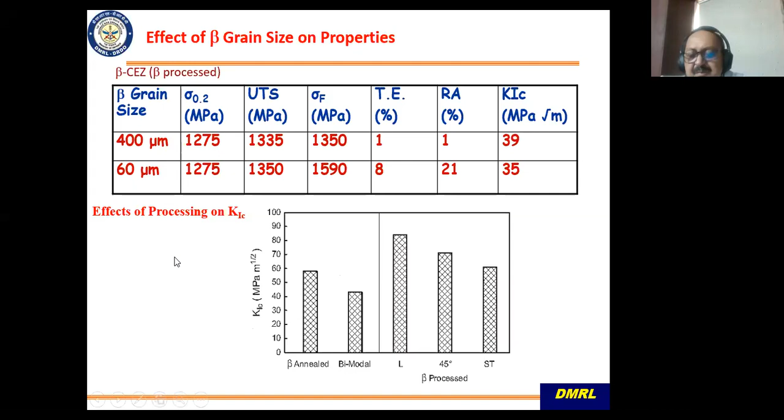I will just briefly touch upon biomedical and gamma titanium aluminide and end my talk. Titanium alloys, as you know, are very biocompatible. One of the first alloys used for biomedical application is Ti-6Al-4V. Although this is not a very good material, people still use it because there was a lot of data available. But there are issues with Ti-6Al-4V because vanadium is known to promote cancer.

So vanadium is getting replaced in newer generation alloys, and aluminium also appears to cause neurological problems. That is why there are newer alloys with higher amounts of beta but lower aluminium, or almost no aluminium.

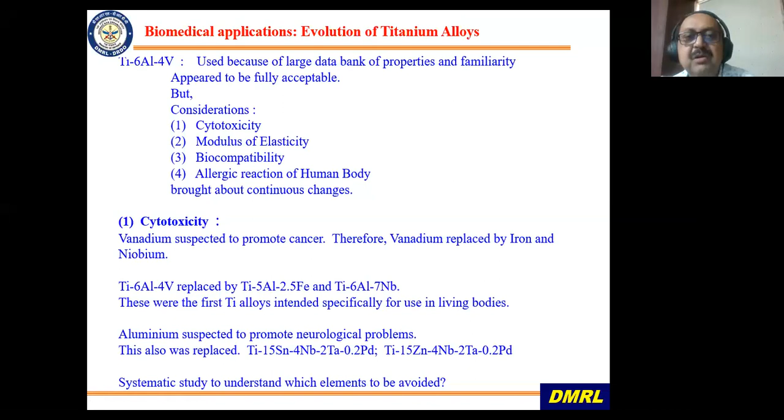The other thing about beta alloys is that they have a much lower elastic modulus, much lower than the alpha phase, and also much lower than stainless steel and cobalt alloys, which are also used as biomedical implants. Now, the modulus of bone is around 30 GPa, so the beta alloys have generally got modulus around 50 to 70 GPa, but more often 60 to 70 GPa. It is better to have a modulus nearer to bone, so you don't have problems like stress shielding and so on.

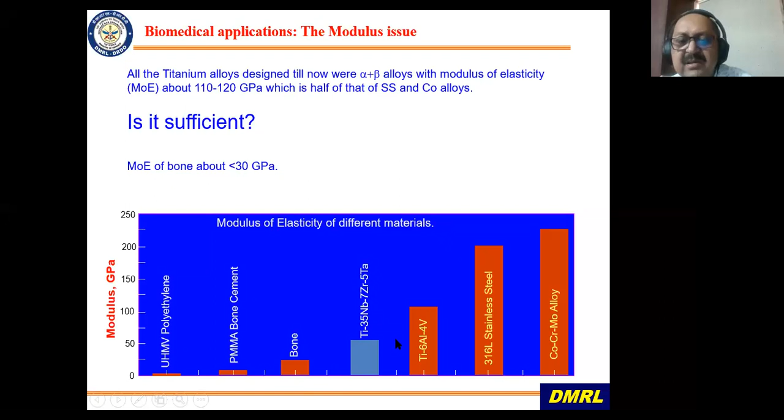So there are new titanium biomedical alloys being discussed. Here I have shown the modulus of cobalt chromium alloy, which is a biomedical alloy, stainless steel, which is also used, Ti-6-4, which is still used as one of the implants, and then another new alloy, a beta alloy: 35Nb-7Zr-5Ta. As you can see, it has much lower modulus, approaching the modulus of bone. That is why these alloys are becoming famous.

The designing depends on whether you can have your composition so that you can have twinning and martensite formation, then you can have this lower modulus. That is what people have realized. So there are a host of compositions which people have come up with for biomedical applications, but it is still seeing use, not exactly widely used till now.

Here again, I'm showing the properties of different alloys used for biomedical applications and their modulus, strength levels, elongation, etc. You can see these newer beta alloys have much lower modulus compared to alpha plus beta or alpha alloys. Strength is actually not a criteria, but you have to have sufficient strength, that's all. Strength has never been a criteria for biomedical applications. So people are designing new alloys for biomedical applications.

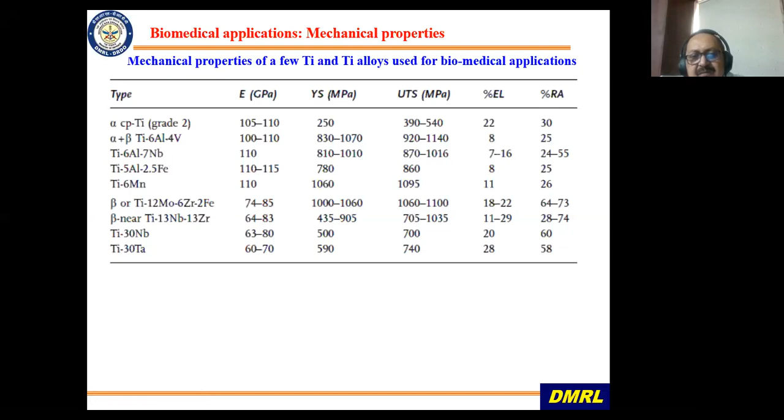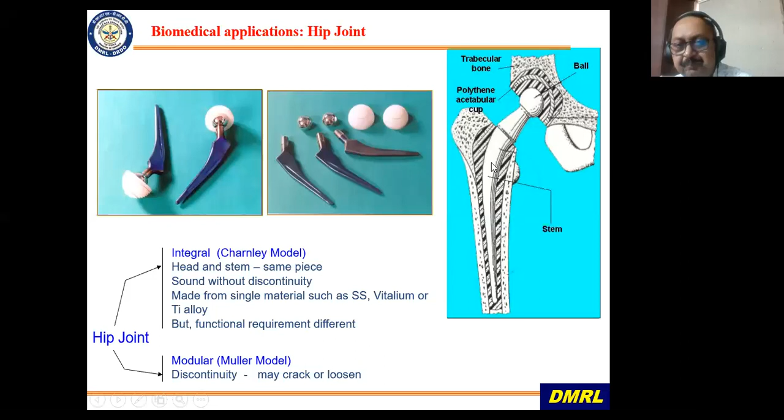Made of titanium. In DMRL there was also earlier work on the Kalam-Raju stent, but that was made of steel. Now you can use shape memory alloys. Dr. Bhaumik in NAL is doing some work with Sri Chitra Tirunal Trust, and they have made a stent made of TiNi, nickel-based TiNi shape memory alloy, because shape memory alloys can change shape just by phase transformation, which can be done by heating with an infrared bulb. As you all know, a stent is used for clearing out blockages. So there is a huge amount of biomedical field.

Now I'll end with titanium aluminides. Titanium aluminides are basically intermetallics, and if you increase the aluminium content in titanium alloys up to around 40 to 45 or 48%, then you start getting a phase known as gamma, which is an ordered structure.

The advantage of this is, firstly, it has very good oxidation resistance. Here I am comparing the near alpha titanium alloy like IMI 834 with the second generation gamma aluminide and the third generation gamma aluminide. You can see the oxidation resistance is much better for these alloys — that's the first advantage. Another advantage is the density is much lower, so it's very lightweight. Elastic modulus is much higher, 170 GPa, so distortions or flapping of the blades are less, and it retains its strength up to around 800 degrees centigrade. So this is beyond conventional titanium alloys, and it can directly replace nickel-based superalloys.

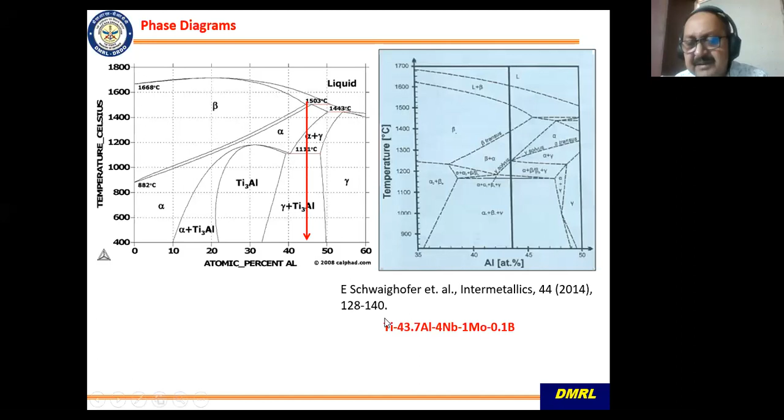And there are different alloys being designed. Presently we have also started some work; I can show you some of the compositions we've studied. Again it's a very complex phase structure. You have at least 3 phases: bright beta phase, then the gamma phase which is gray, and slightly darker alpha phase. So there are at least 3 phases, if not more. It's a complex phase diagram, and the microstructures are slightly complex too.

We had studied certain alloys which are listed here, including the GE composition that GE has already used, 48Al2Cr2Nb, and we studied the oxidation resistance and the creep. One of our alloys, GA6, is giving very good creep properties. This composition has intermediate oxidation resistance, but creep is very, very good. So we have to evaluate other properties like fatigue, and then we can go for usage.

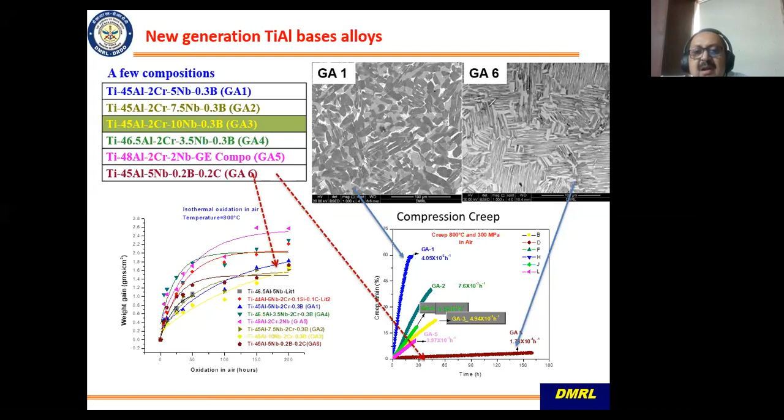So I come to the end of my talk. I'll just leave you with this image — this is a GEnx engine, and as I told you, these last two stages are made of the 48-2 GE composition, and it's flying in a commercial aero engine. So their engineering is such that they can handle this kind of brittle material also in the engine.